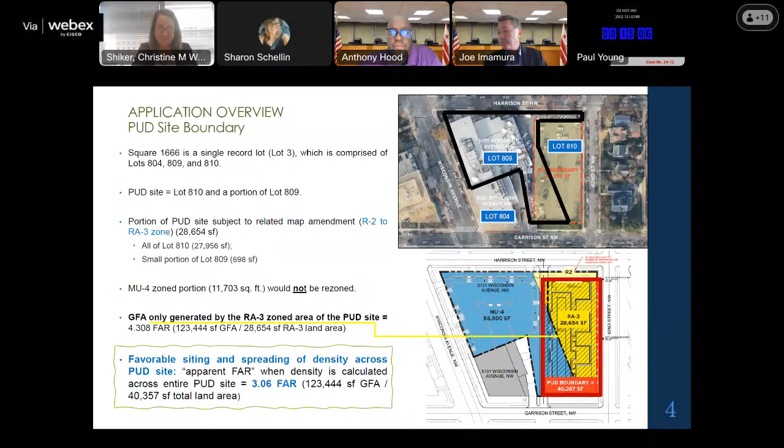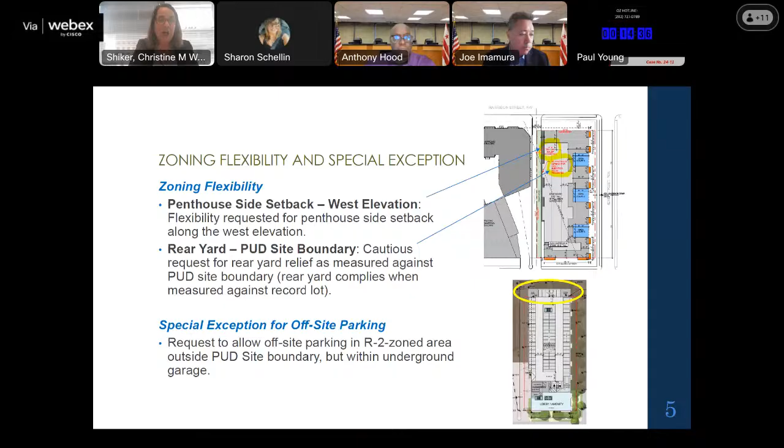The project complies with the development standards for the RA3 zone. There are only 2 small areas of flexibility that we will touch on and highlight in our testimony by Ms. Alexander. We've also requested a special exception for off-site parking, which allows the garage to extend under that R2 portion of zoning at the very top. We have specifically stated how we meet the standards for that special exception.

The proposed zoning is not inconsistent with the future land use map, which designates the site for moderate density residential and mixed use for medium density residential and moderate density commercial. The rezoning is also not inconsistent with the recently adopted Wisconsin Avenue Development Framework Plan designations, and as Ms. Elliott will discuss, this project furthers many goals of that development framework plan.

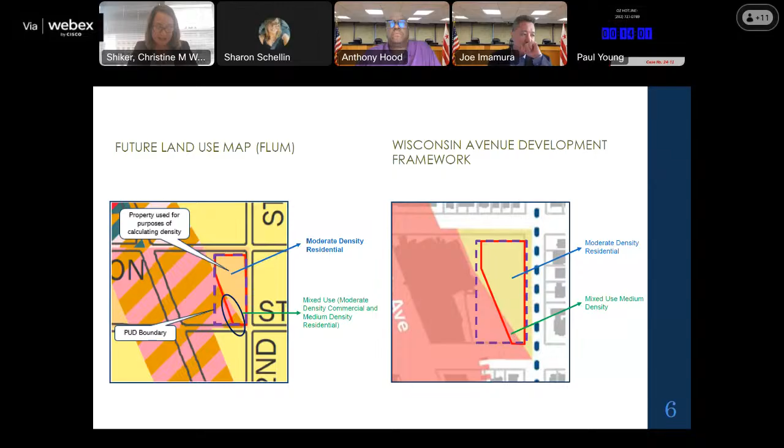We are pleased to have broad support from the DC agencies. In its supportive report, the Office of Planning did request additional details regarding the sustainability aspects of the project, which we will include in our presentation. DDOT indicated no objection based on two conditions, which the applicant will agree to, set forth on page 2 of the DDOT report. If there are any questions, Ms. Milanovich is happy to answer those, or any other transportation related questions.

We are also very pleased to have strong support from the community on this project. The ANC voted unanimously to support the project based on an agreed upon MOU. Mr. Donahoe will talk briefly about that and about the very robust community engagement process. As you saw, there are many letters of support in the record.

We have over 40 letters of support filed as of this afternoon. But I think it's very important to note that we did see a letter from the property owners on the 5100 block of 42nd Street. These are residents immediately across the street. The applicant has met many times with nearby neighbors, including residents from this block, during the community outreach process that spanned over 18 months. However, this letter filed yesterday is the first time we've seen this specific list of questions, although many of these issues have been resolved through other formats. So we've revised our presentation to make sure we answer all of those questions and address those concerns, as I believe the neighbors will be here and that will help them.

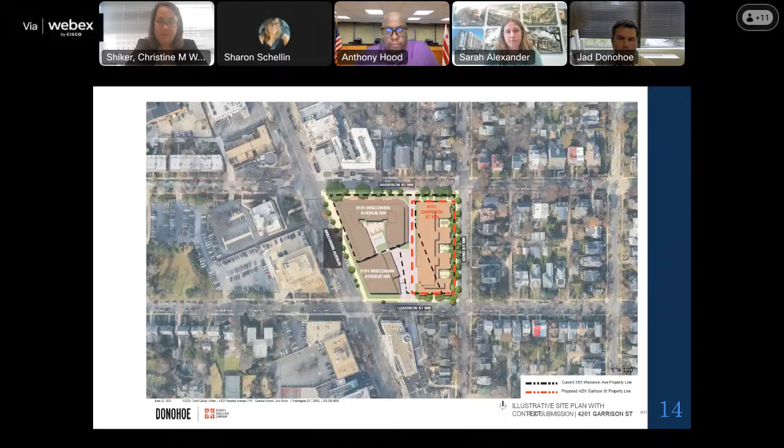The original plan that was in the Office of Planning report did have a more U-shaped building with the courtyard facing towards the west, which would have actually separated the other property owned by Mr. Donahoe a little bit more and given a little more light and air to that building. But it was decided that instead, we would create the courtyards facing 42nd so that light and air would better be able to access the adjacent homes.

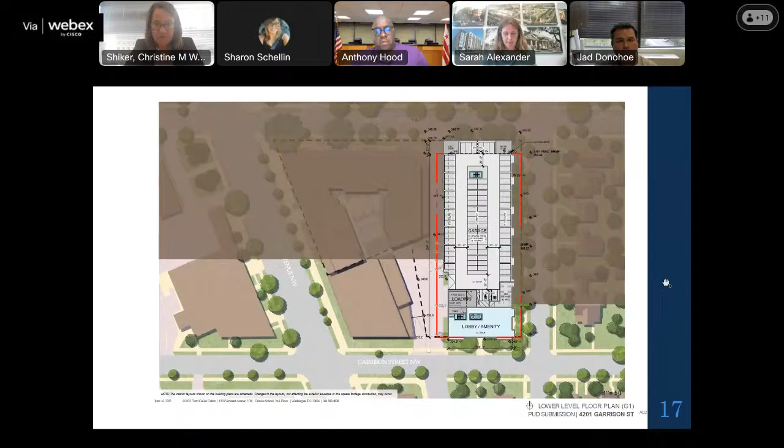And then our penthouse level. I think this pretty clearly shows how we have concentrated the height on that western portion of the site. It is due to the setbacks, that's what I skipped over. On the north side, we have a 21-foot setback from the property line adjacent to Harrison. On the eastern side, we have a 15-foot setback on 42nd. And on the southern side, there's a wider right-of-way and then a setback across the street.

So with all of that, we're about an average of 90 feet away from any of our adjacent buildings, just to our building face. Beyond that, we've set back 28 feet from the northern side to our penthouse, 36 feet from the edge of our building plus that 15 feet, so really about 50 feet from our property line to our penthouse from the 42nd Street side, and another 18 feet from the south. So again, pulling that height as far as we could away from the adjacent neighbors to be as sensitive as we could.

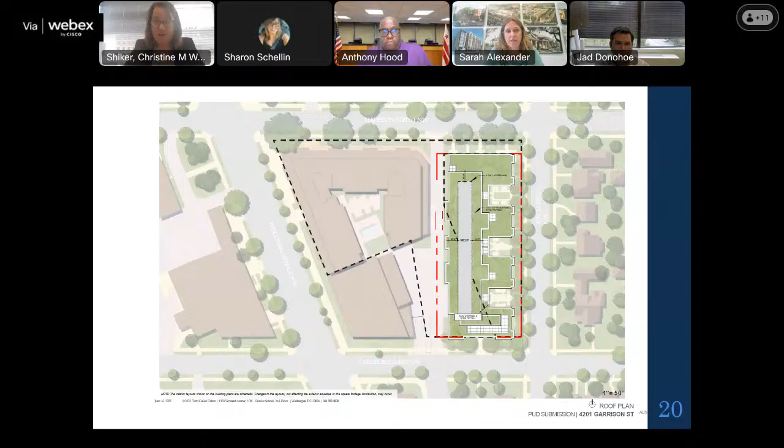So this is really taking that rendering you saw and showing you the elevation of it. You can see those 4 individual pavilions, each with their own character, but respectful of each other and harmonious in their design. We have employed the bays, the varied facade design, the pavilions. We have shown entry stoops for the units along the street so we can activate the street. There's also a connection between the courtyards, which are for residential use, and the street. But that allows the project to really articulate itself along that streetscape in a way we feel is appropriate for the context and neighborhood.

You can also see the changing grade across the site. In terms of the building height measuring point, this is important. One of the concerns we heard was regarding the building height measuring. We have measured our building at the middle of this facade to the top of the screen, the middle of that frontage on 42nd. So the 50'3" is measured from the grade at the middle of that frontage. And then the penthouse is in addition to that, but set back, as I mentioned previously.

On the bottom of the slide, you see the private alley facade. That really is facing the buildings immediately at the adjacent alley, but we did make sure to wrap the facade character a good distance back on either corner so that building will feel as a complete building when viewed from the street.

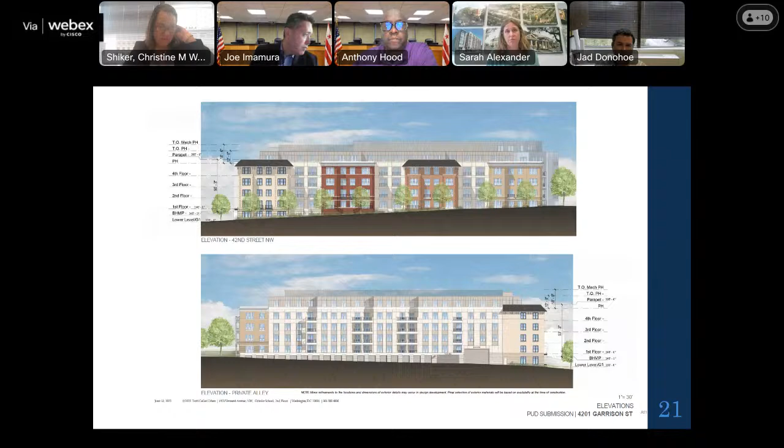And I did want to ask if you were able to pull up A07 of our PUD document. I could go through some of the street sections, if that's possible. Or Sarah, I think you did testify to that. Why don't we wait and finish up our presentation, and then we can see if the commission has any questions, and we can pull that up at that time, if that's okay, Chairman Hood.

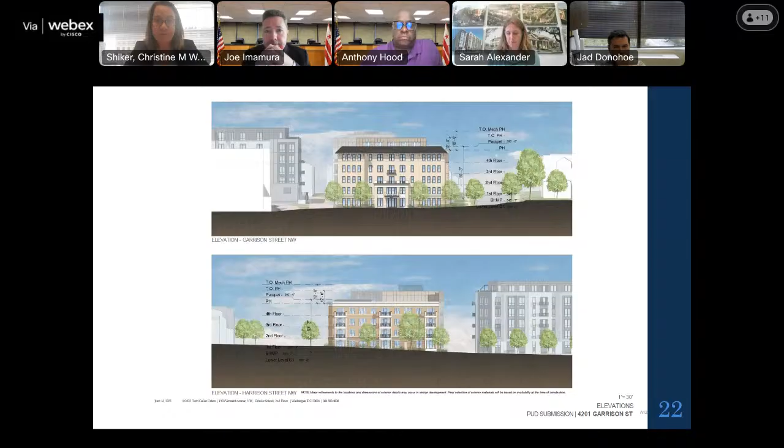No problem. Okay, then the last thing, really quickly, we have the materials for the project. We did pick different color bricks for each of the buildings and different window colors to try and add to that authenticity of the different building identities. And you see those on the next page as well, and then the final page.

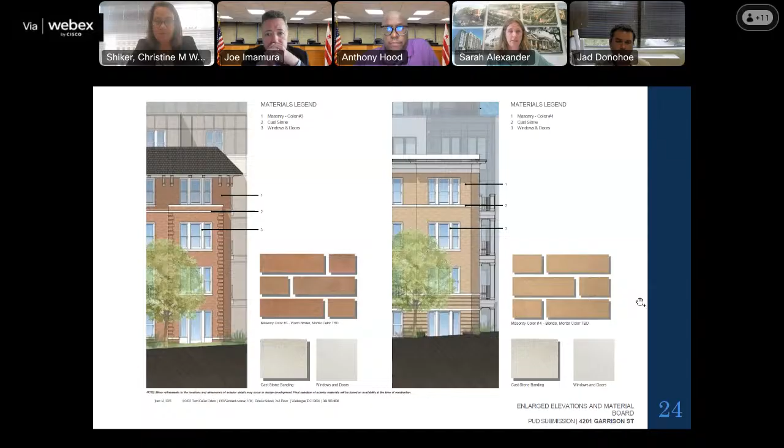Okay, and then for landscape, I can go into a brief element of that if you go to the next slide, please.

All right, so this is the landscape approach for our project, which is intended to enhance the pedestrian experience and to help blend and project the project into the surrounding neighborhood. So all of the streetscapes include a 6-foot wide sidewalk with street planting zones and are in line with those found throughout the neighborhood. We have a generous planting zone between the sidewalk and our building facades ranging from 10 to 21 feet, which include decorative planting, rain gardens, and a variety of canopy and ornamental trees. And there's a wide entry walk on Garrison that provides access to our main entrance, and a smaller paved walk on Harrison. Nestled between the planted areas are several residential scale walkways providing access to individual units along 42nd and Harrison Street.

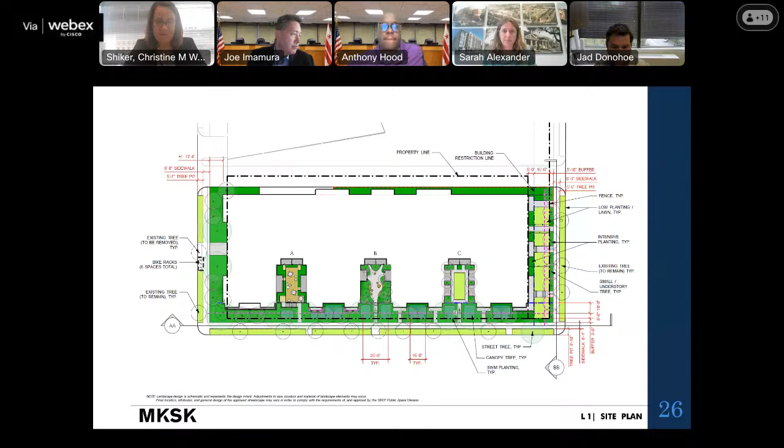And the trees and planting around the building are enhancing the streetscape experience while buffering areaways and providing privacy for units.

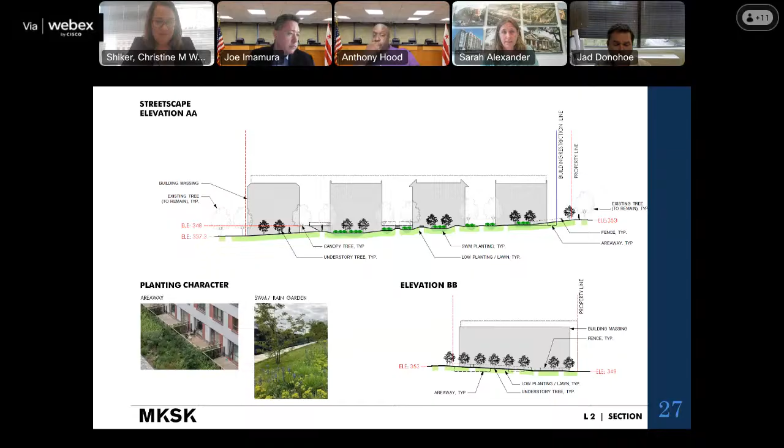And we have the 3 small courtyards, which are intended for use by the residents, which face Garrison Street and 42nd Street. Each courtyard includes several small terraces for residents and adjacent units, and all the courtyards are planted in order to enhance views from the streetscape.

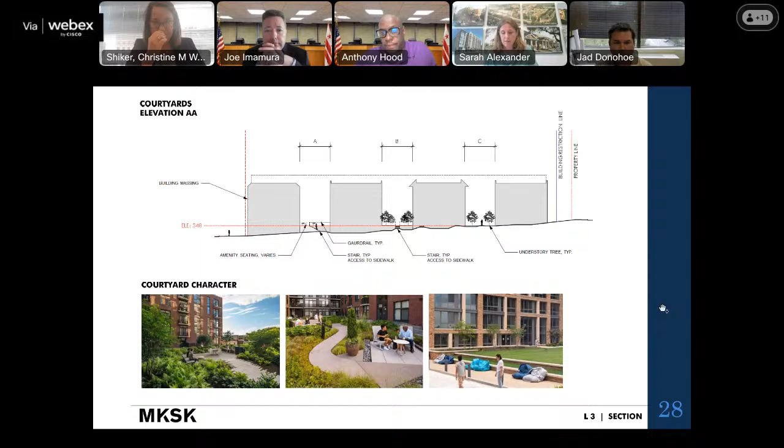And lastly, the planting palette throughout the project includes a variety of native plants related to the scale and character of the surrounding neighborhood while providing year-round seasonal interest.

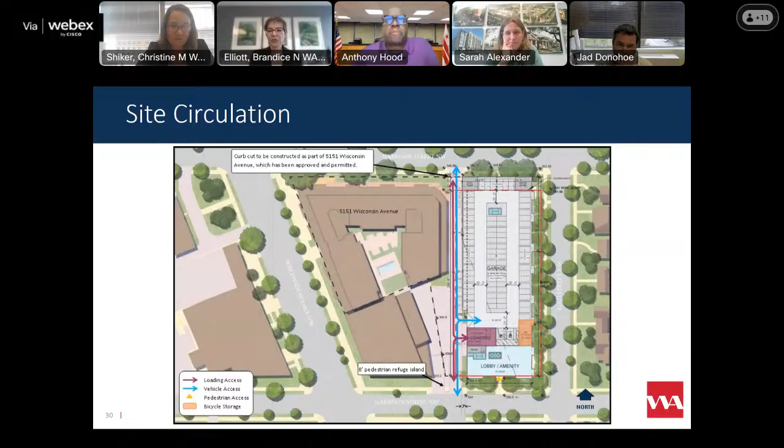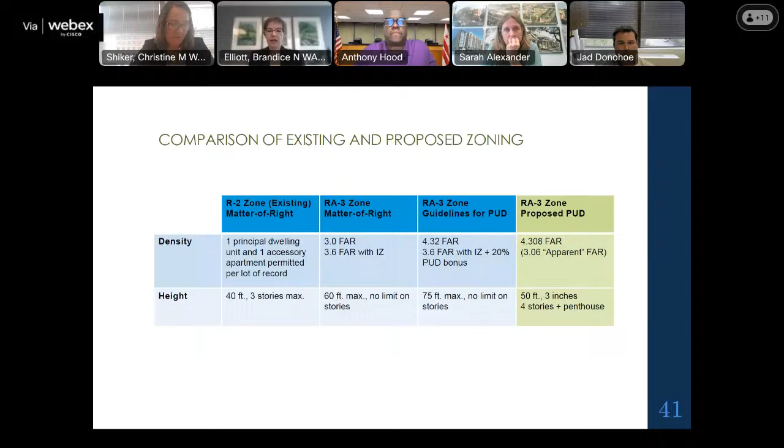So we just have a quick note on this one. The proposed 4.308 FAR is less than the maximum permitted for a PUD, and the apparent FAR is consistent with the matter of right. This project would only be using 50 feet 3 inches of height, which is less than the matter of right height of 60 feet and the allowable PUD height of 75 feet. Mr. Young, could we skip to slide 44, please?

So now we're just going to go into a little bit of detail about the framework. I do believe this is the first case that you all have reviewed using the framework, so I have to introduce it a little bit, I think.

The purpose of the framework was to provide further guidance on how to implement the comp plan changes for the Wisconsin Avenue corridor, particularly how to provide more housing and affordable housing. The subject property is specifically identified in the framework as part of a concept to break down larger blocks with pedestrian connections and to activate vacant spaces, of which this is one in Friendship Heights.

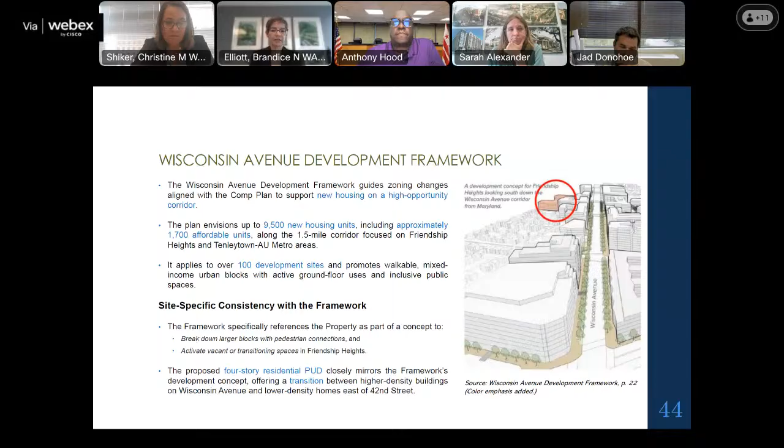The proposed PUD mirrors a concept in the framework that shows potential development as a transition between Wisconsin Avenue and the lower density on 42nd Street. Next slide, please.

So there is a two-zone strategy on this property. The PUD site spans both the proposed Friendship Heights transition zone to the east, and the mixed-use corridor zone to the west. On the east side, where we have the transition zone, it's intended to be moderate density residential. The framework recommends 50 feet of height plus penthouse, and the PUD matches this with 50 feet 3 inches, plus an 18.5-foot penthouse.

The FAR recommendation for this side is 2.16. Now on the west side, which is the mixed-use corridor zone, that's intended to be medium density mixed use, closer to Wisconsin Avenue. For this zone, the framework recommends a height of 75 feet plus penthouse and an FAR of 5.4. So the PUD proposes a lower FAR of 4.308 for the property, and 3.06 across the full site.

The higher density allows for the PUD to exceed affordable housing goals also recommended by the development framework, which allow it to maximize affordable housing at varying levels of affordability. The project's bulk and scale is also consistent with what is illustrated in the development framework, so it meets the expectations of both proposed zones. Next slide, please.

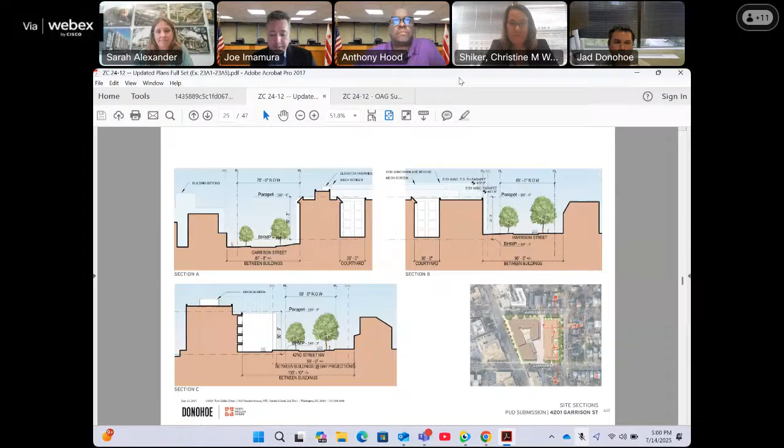Terrific, thank you. That's exactly what I wanted to hear and see, so I appreciate the additional explanation.

This project is certainly laudable with a number of benefits here. Of course, the 3-bedroom at 50 and 60%, a total of 9 3-bedrooms, 33% affordable housing is just remarkable. All electric. Did I understand that right? This is all electric? The units are all electric, correct? The units are all electric. Very good.

I'm curious, and LEED Silver, I did see that you're awfully close to LEED Gold. So what would it take to pull you over for that 1.5? I thought I saw 58, somewhere around there, close to 60. So what would it take to pull you over to LEED Gold? I think we have every intention of trying to reach there. We just didn't want to make promises we wouldn't be able to keep. So the goal was really to ensure that we endeavored to do that, but the promise was LEED Silver. Okay, well, you're resting pretty well at LEED Silver for sure. Would like to see you achieve LEED Gold. I'm cheering for you all to do that.

Working across, I guess this would be a comment just for the entire project team, working across agencies, DCH, HCD, DPR, the bocce courts, right? What a great amenity there. Just kind of going through some of my notes.

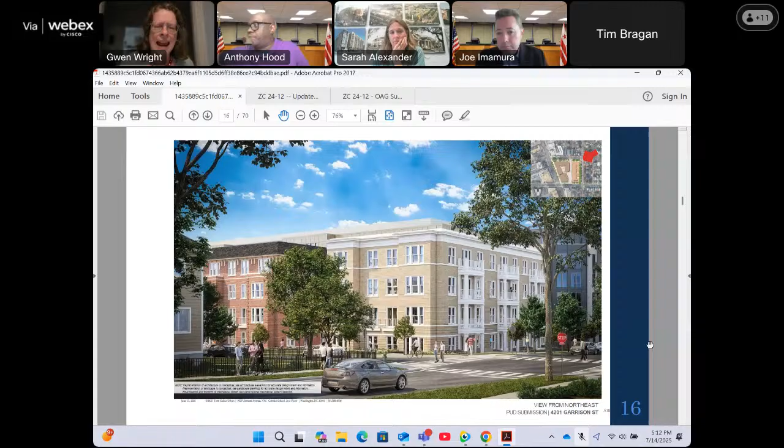And in fact, maybe we could just pull up the image of Harrison Street, which is the biggest facade that we're dealing with. I wonder, Mr. Young, if you could pull up from the PowerPoint the Harrison Street facade. Yeah, I mean, I think that's actually the Harrison Street, I think. Yep, there we go. That's Harrison Street. So that's, again, a very large and sort of imposing building.

But there are a lot of architectural moves, such as it's not a total deep setback of the top floor, but at least a sort of belt course or line that helps break up the top floor. So you have the feeling of sort of base, middle, top, the treatment of the entryway that is sort of popped out a little bit. And I just think as a commission, we should keep some of these ideas in mind, even as we look at other projects. This is a really, really good example of how a building that is sort of imposing has been sculpted to make it more compatible with the adjacent lower density neighborhoods. And I think that's, again, something to keep in mind.

One thing I wanted to also do was, in going through the comments from the neighbors across the street, I want to give you all a chance to address each of them specifically. One of the things they keep talking about, I want to just put it out there, is a 75-foot tall structure. When actually, I think the measurement for the majority of the structure is 50 feet. And even if you include the penthouse, it's another maybe 16 feet from what I could see. So I just want to give the applicant a chance to address this issue that's been put out there about a 75-foot tall building.

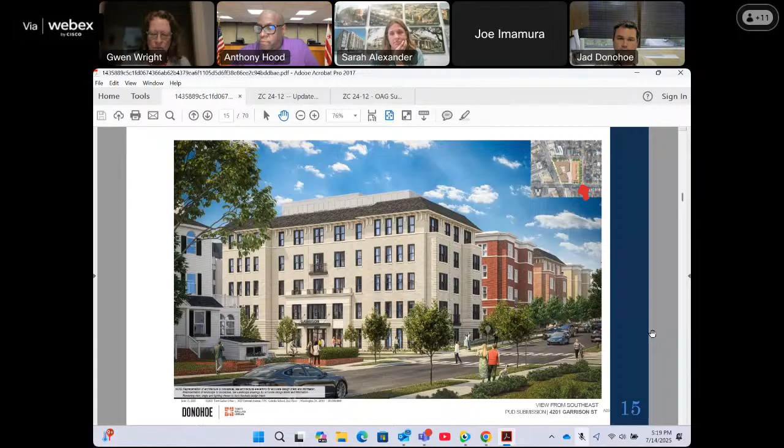The next thing they brought up was whether the applicant conducted a shadow study, and I wanted to give the architect a chance to talk about that.

Unfortunately, since we just got the response yesterday, we weren't able to enter that into the record, but we did look at it today quickly. The majority of the year, there would be no impact to any of the adjacent homes, given the way the height is concentrated on the western side and is pulled back as far as we can from the adjacent homes. In the winter months, in the late afternoon, there would be some impact to the northern and eastern neighbors, but that would be after 3 o'clock in the winter, so it shouldn't be of any great impact to any of the adjacent residences.

That's great. And I don't know the proper protocol, but if you've actually done the shadow studies, if they could be added to the record just as a point of information, I think that would be helpful to do.

Another question they raised is how do you feel about the residents of the development not being allowed to get residential parking permits? That's something that happens on a number of multifamily projects. Do you have any feelings about that? I think Ms. Milanovich could address that issue.

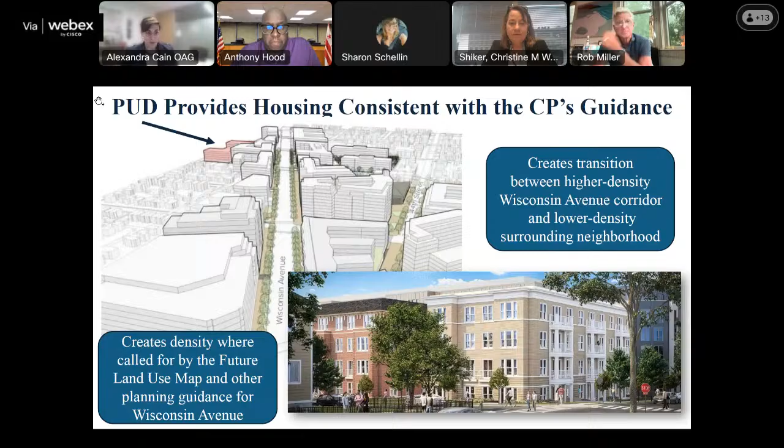That is the end of my testimony, but I am happy to answer any questions. And in addition, our written statement is in the record at Exhibit 34A.

Thank you again, Ms. Cain. We appreciate your examination in this case and assisting us as we continue to move forward. Let's see, any of my colleagues have any questions, comments? I'm looking at your heads, not seeing it. Okay, no questions of OAG.

Okay, Ms. Shiker, do you all have any questions of OAG? We do not. Thank you.

Okay, and Ms. Schellin, have we been able to get Commissioner Quinn? Mr. Quinn sent me an email saying that he was sorry he was in another call and he would be off at 6. So I don't think he's available. Okay, okay, I got it. Okay, alright. Thank you, Ms. Cain, we appreciate your examination again, as I mentioned previously.

Alright, so we need to move. We'll come back at 6 to the ANC if we're still able to be on. Ms. Schellin, let's go to the District Department of Transportation and the ANC. I'm sorry, District Department of Transportation and the Office of Planning. Sure.

Good evening, Chairman Hood and members of the commission. For the record, my name is Erkin Osberg with the District Department of Transportation. DDOT is supportive of the applicant's PUD application to develop the property at 4201 Garrison Street Northwest. In our July 3rd, 2025 report, which is in the record as Exhibit 36, we recommended approval with 2 conditions.

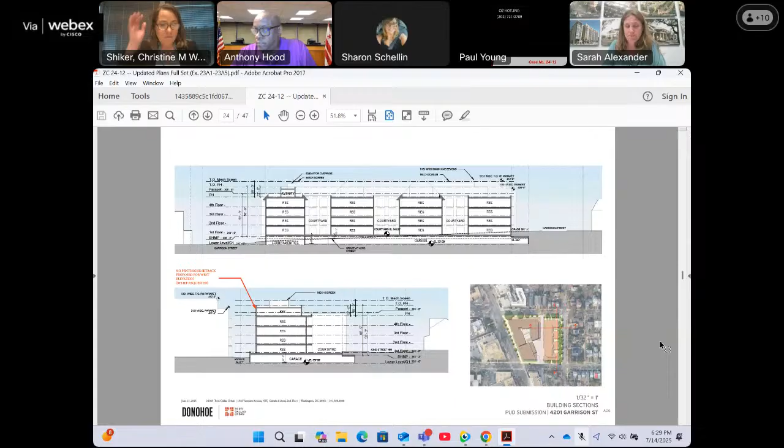Thank you. Chairman Hood, members of the commission, based on our testimony and the reports of the district agencies and the strong support of the ANC, we believe the application meets the standard of review for the PUD and map amendment. While we understand we have some documentation to submit to the record on the many topics discussed today, we ask the commission to consider taking proposed action at its earliest convenience to allow the project to continue moving forward while we continue to document this information.